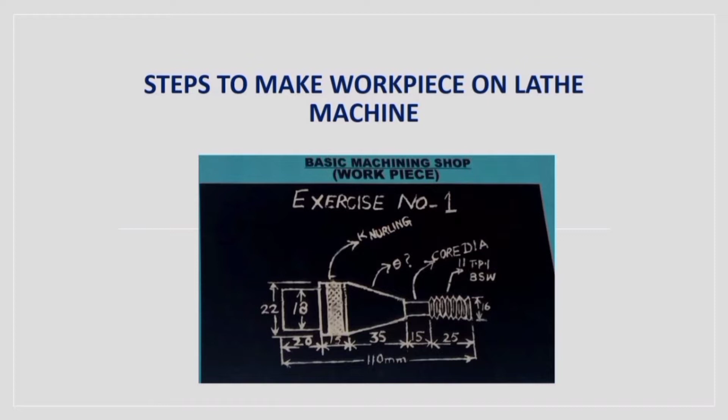Welcome to this video in which we will discuss steps to make a simple workpiece on lathe machine. Let's start the discussion. To make this workpiece on the lathe machine, you have to go through the following steps.

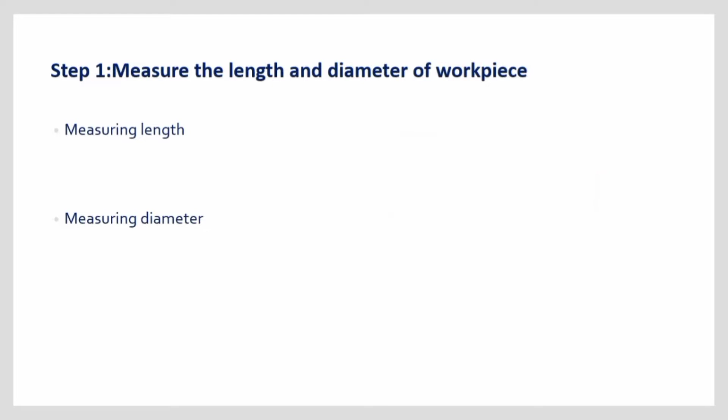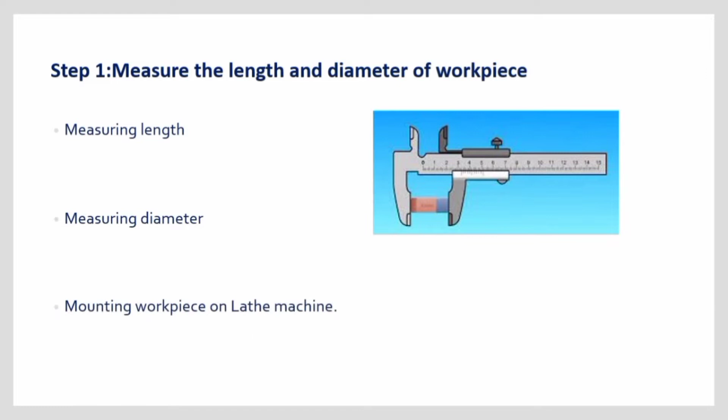Step number 1 is measure the length and diameter of the workpiece. Well, at first, we should measure the length and the diameter of the workpiece using vernier caliper. After measurements, we have to mount the workpiece on lathe machine's chuck by using chuck handle.

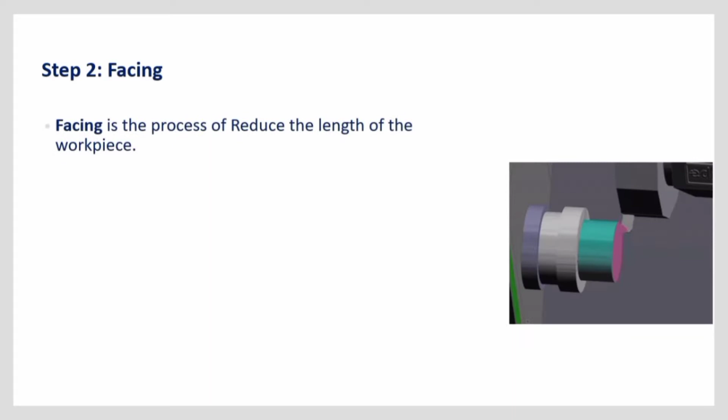Step number 2 is facing. The first machining process you should do is facing. Now what is facing? Well, facing is a process where you reduce the length of the workpiece. Now the question is, why are we doing facing first? Well, it's because we are reducing the length of the workpiece up to the required length.

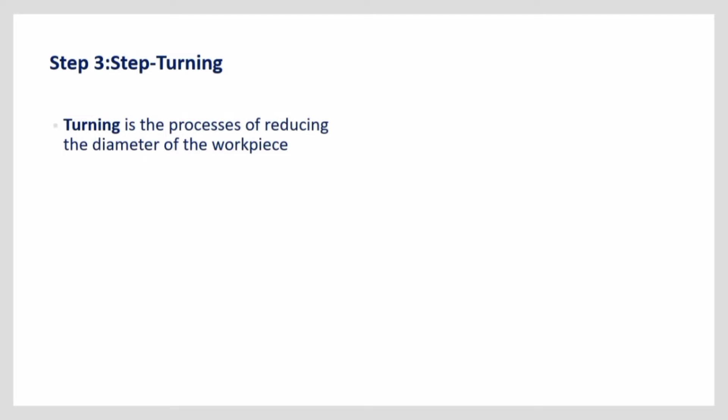Step number 3, that is step turning. Before explaining you guys the step turning, let me explain you guys about the straight turning. Well, the straight turning is a process of reducing the diameter of the workpiece, and step turning means reducing the diameter of the workpiece in steps.

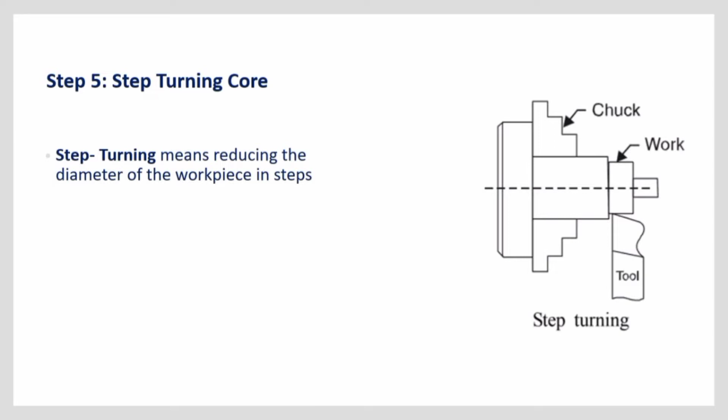Step number 4, straight turning. As I have already explained you guys, the straight turning is a process of reducing the diameter of the workpiece. Step number 5. Well, step number 5 is step turning core. As you guys already know about the step turning, we are doing the same procedure here again to make the core.

Step number 6, taper turning. Taper turning is a process where the diameter of the workpiece is gradually reduced from one point to the other point of the workpiece.

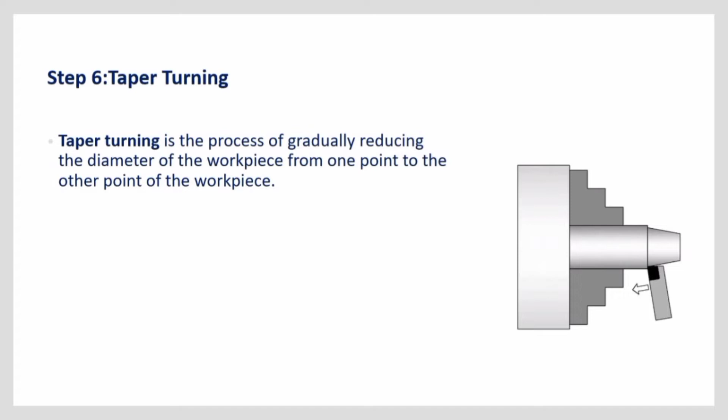Threading. Well, it is an operation that uses a single point cutting tool to produce a thread form on the cylindrical workpiece. As you guys are familiar with nuts and bolts or screws, you must observe there a continuous helix. That helix is called a thread, and the function of the thread is to connect parts, or you can say it acts like a fastener. There are many types of threads, but here in our case we are considering V-thread.

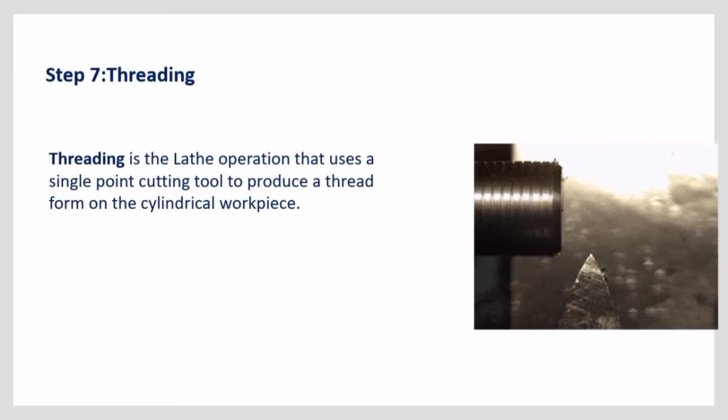Last operation is knurling. The operation is performed for producing indentations on a workpiece. Knurling allows better grip on the knurled object. This process is performed at the end of all processes with a tool called a knurling tool.

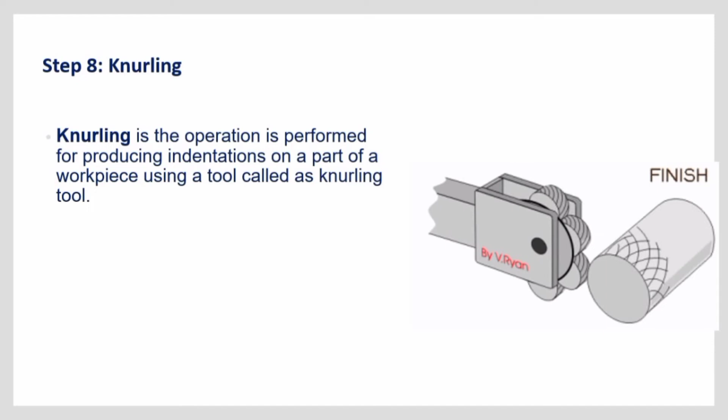You can see here we have a solid bar. At first, we need to mount the workpiece on lathe machine's chuck. Then we will perform the facing operation, in which we will reduce the length of the workpiece, and for that we will use the cross slide of the lathe machine.

After that, we will perform the step turning operation, in which we will reduce the diameter of the workpiece up to a certain length. In this process, we will use the cross slide for feed and carriage handle for step turning. Then we will perform straight turning, in which we will give feed to the tool by using cross slide and then move the cutting tool to the end of the workpiece by turning the carriage handle.

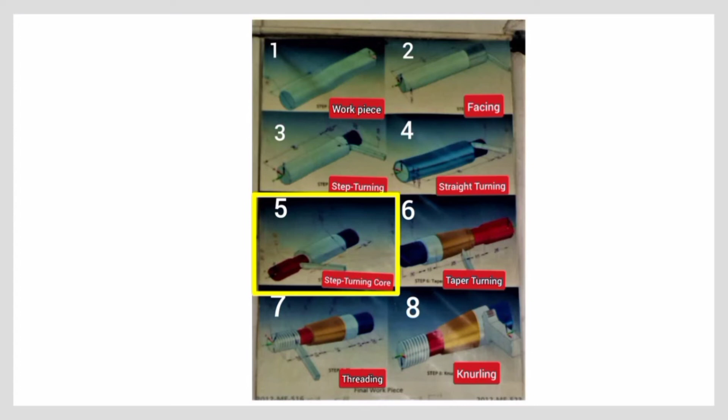After performing straight turning operation, we will perform step turning core, in which we will mount the other side of the workpiece in the chuck and perform the step turning operation as described previously. Then we will perform taper turning operation. For that, we will rotate the compound rest, and then using compound rest, we will perform taper turning operation. Remember, we still have to provide feed by cross slide.

After taper turning, we will perform threading operation, in which we will reduce the speed of the chuck. Then we will set the quick change gearbox for the required pitch, and then threading can be performed. Remember, in this operation, lead screw will rotate. At last, we will perform knurling operation with the help of a knurling tool.

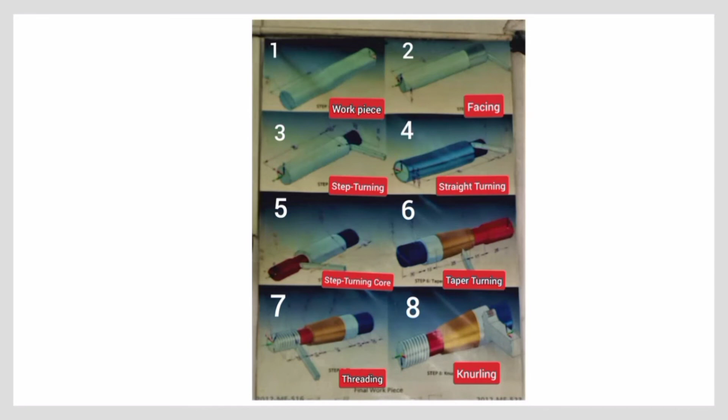Well, that's all for today's video, in which we discussed the steps to make a simple workpiece on lathe machine.